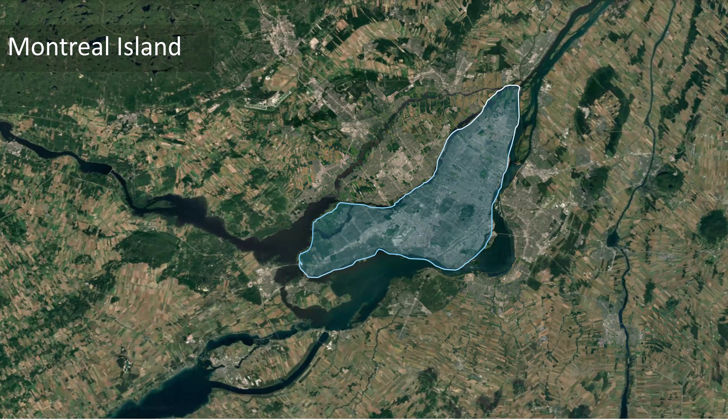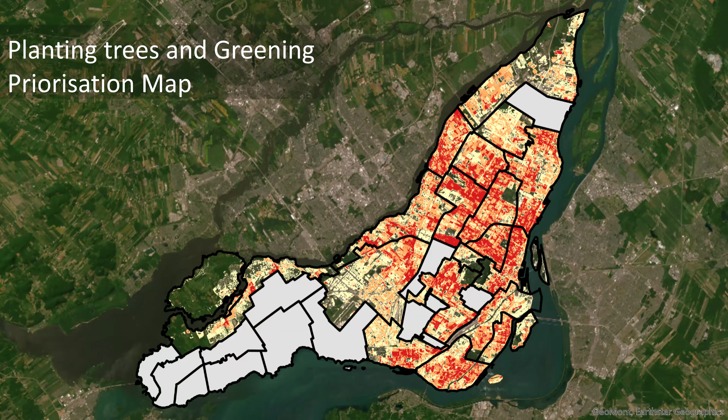What we do - the idea is why planting trees and greening cities. So the lecture will be not just on trees, but also on green actions that we have been taking so far to prepare Montreal for climate change, through the benefits that trees can give us in terms of carbon, and the benefit that we can use trees and planting - trees, shrubs, and everything - in this idea that this is essential to fight heat islands, erosion, and to preserve diversity through species, etc.

So just an idea like that: here is the idea of redesigning cities under the concept that a city can become the forest, what we call urban forest. This can be obtained through several guidelines that I want to underline here, like swales, rain gardens, to enhance the urban tree cover, and all this benefits us by providing ecological services, improving water quality, and better air quality. I'm going to show you an example of what we've been doing so far.

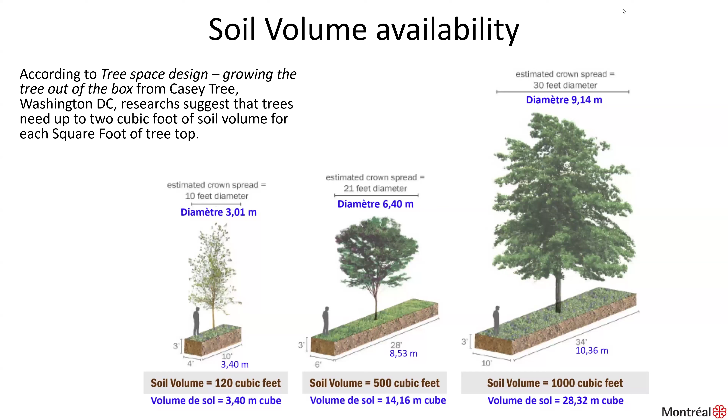So what we have been doing in the 2010s is developing ways and tools to enlarge these tree pits into 10 cubic meters. So that's what we see here - it's a calculation between the canopy and the volume of soil that the tree needs.

Here, several new species of trees - cultivar breeding species developed in our nursery in Montreal - these species are taken back by the private nurseries where we buy our trees for different garden and parks departments through boroughs in Montreal. So different types of new breeds - pine, salix, ginkgo, linden, maple, poplar, oaks, etc. All these are native and make better species to sustain the hazards and problems trees face when they grow along streets.

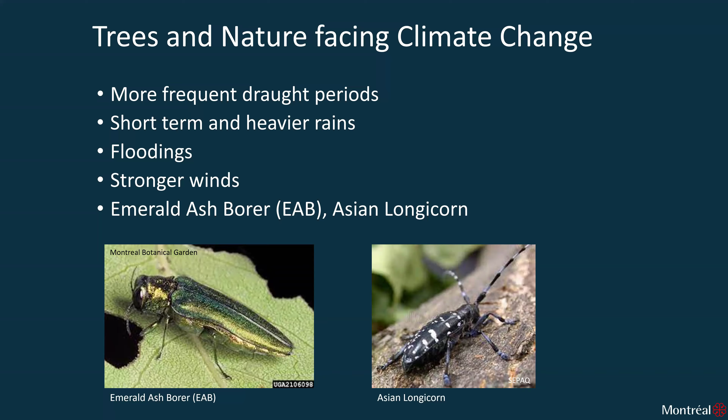And also all the problems that trees are facing with disease from insects, like the emerald ash borer and the Asian longhorned beetle, which you might know. So faced with the climate urgency, it's about acting against a climate crisis - reducing carbon and greenhouse gas emissions, and adapting for resilience to climate change. So the city of Montreal has been taking these issues seriously and tackling a way to go in a better direction.

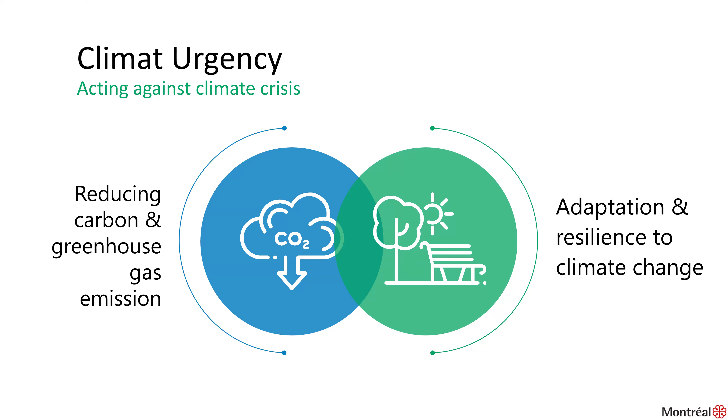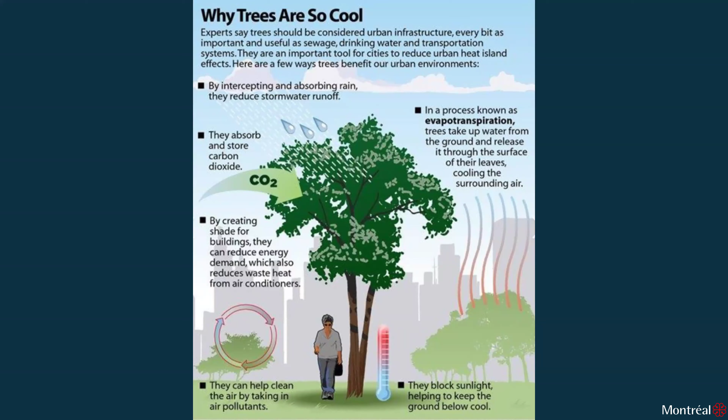This has been tackled by the climate change plan 2020-2030, which we've been implementing to move to a resilient and zero carbon city. The idea is reducing greenhouse gas emissions from 2013 levels. Our target is to attain 55% under 1990s levels, achieving carbon neutrality by 2050, increasing resilience and collective adaptation capacity, and gathering Montreal into an active community. This is to bring everybody together - not the action of one person or one group, but the action of everyone. Everyone is concerned.

Area of protecting natural sites - all this is to benefit biodiversity. We want to attain 10%. So far, it's almost 8%. But also we want to face the vulnerability condition to different climate issues.

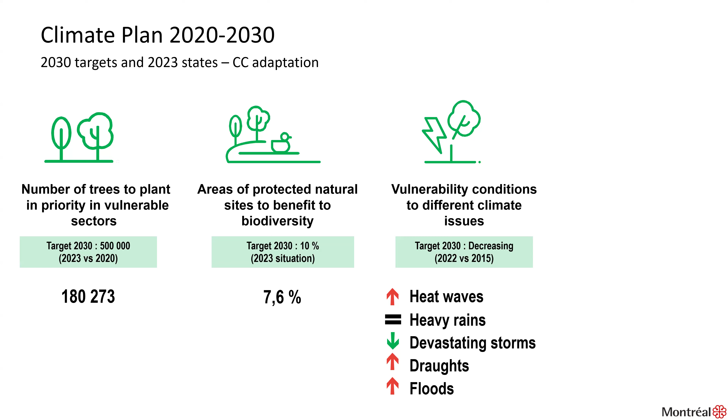The target we want to aim at is decreasing these conditions. But so far we see that heat waves are increasing, devastating storms are decreasing, but drought and floods are increasing. So that's the actual condition.

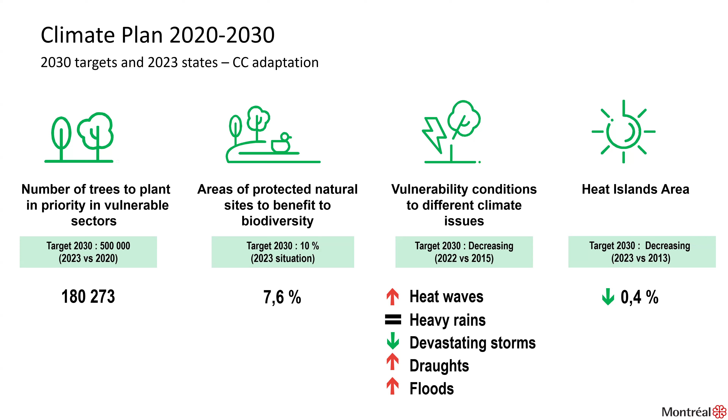We also want to take action on heat island areas. In terms of decreasing, the decrease is about 0.4 to 0.5%. So far we'd say we're heading in the right direction.

Following this, one of the ideas within the 2050 land use and mobility plan - the plan d'urbanisme - is one guideline: converting mineralized surfaces into greening and equality, to achieve the zero net objective. That's the idea here, and what can we do with this?

Well, one action we've taken is to remove and change Montreal schoolyards with a participatory project into demineralization. So we brought in concerned citizens and turned schoolyards into small parks. And all this is to protect and develop the urban tree canopy.

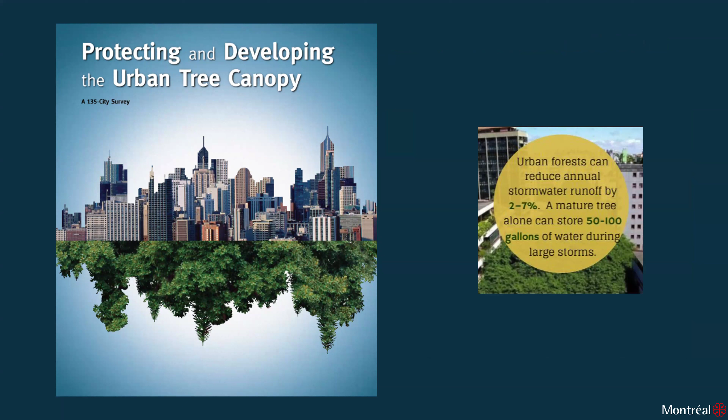That's the idea, because if we can achieve an urban forest, that could be a tool to tackle stormwater runoff. That's one idea - that the urban forest could help us do that, knowing that a mature tree alone could store 50 to 100 gallons of water during storms.

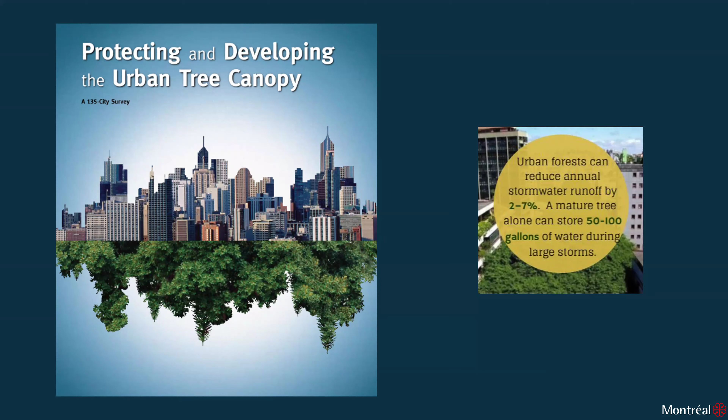Another action we took, that we want to improve, is to plant 500,000 trees. So far we've been planting about half of it. That's the idea, until 2030.

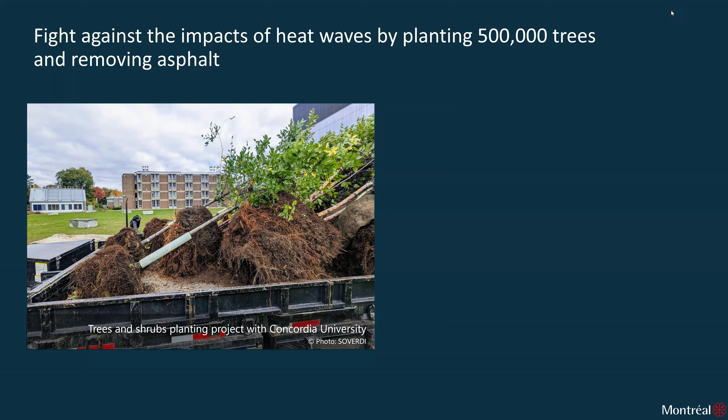This comes with projects like what we had at Concordia University a few years ago for tree and shrub planting with the association called SOVERDI. This has helped us develop new tools in Montreal, like the Montreal canopy map - a tool we have to record and have figures in order to see how it's going and how we can do better, identifying areas that are more vulnerable to drought and heat waves. That's the idea with the tools.

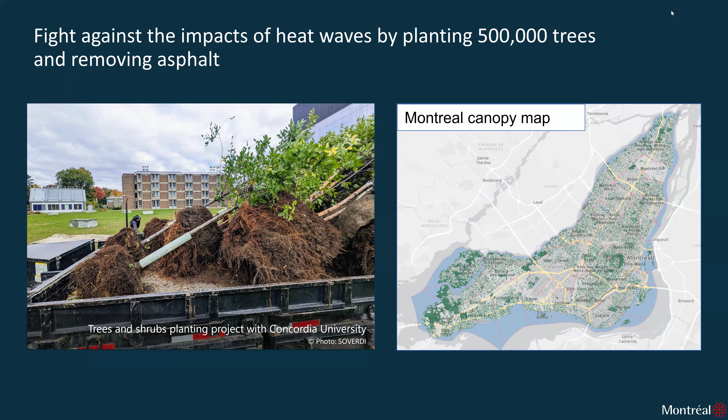We also had adopted the principles of sponge cities that I talked about before, as a priority for areas vulnerable to flooding. We did a public consultation on the future of water in Montreal, which gave us the idea of determining where flooding problems would occur. So we have mapping and tools that can help us identify the areas where we can take action.

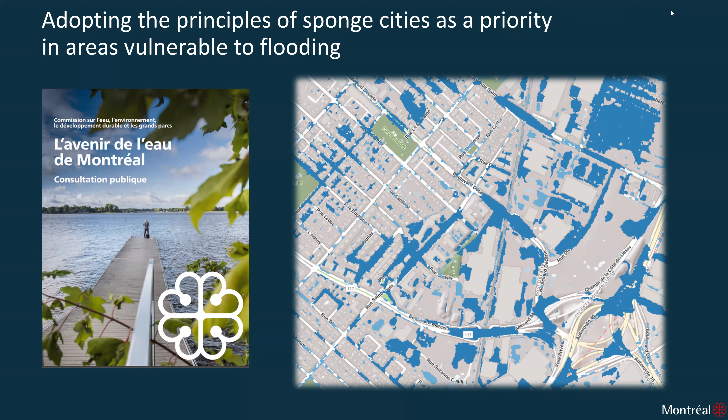Another action we're taking, another guideline, is through industrial activities where we want to restore contaminated soils - a constant issue when we do more construction and infrastructure in our streets and parks. We're always facing contaminated soils.

So what we do is phytoremediation, using Salix. It helps with biodiversity in eastern Montreal. It's been carried out since 2016 by a research group through the Botanical Garden of Montreal. It's really promising - this type of approach, and one of the main species used is the Salix.

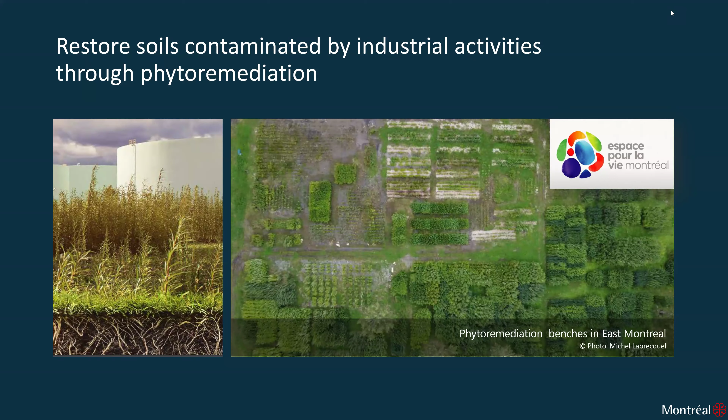So far, I'm going to overview some technical ways of greening and planting streets, things like sidewalk curb extension schemes. You can see here more space that we took from the road and the streets, and we turn it into green space.

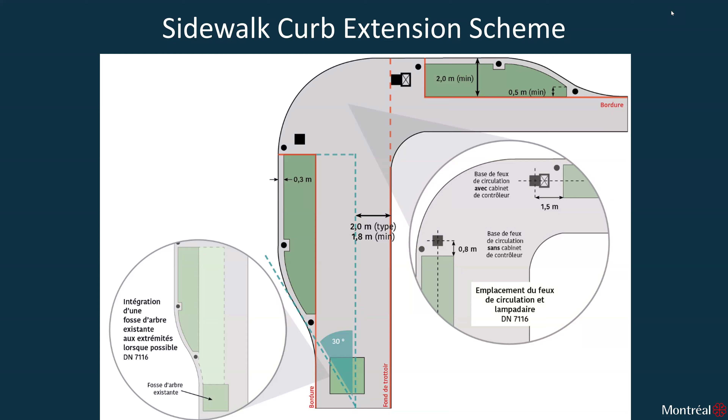These are what we call the curb extensions that's been implemented on intersection streets, more or less, and it's been growing very fast for the last 10 years. That's the new way of doing things, and these curbs will become resilient and will tackle runoff, becoming rain gardens as well.

So that's one of the ideas of the drawing, the normalized rain garden curb extension drawing. It shows how we've been providing tools for everybody at the city who is rebuilding streets, so we tell them how to do these type of things.

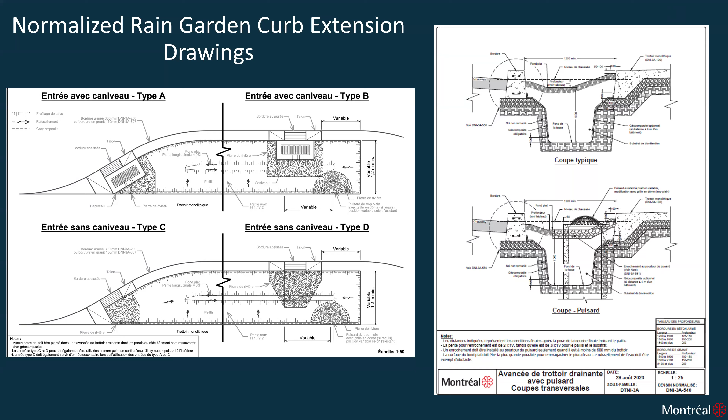That's the idea here. You can see the idea of having tree pits that are more available with more trees, more space for storing water, air and soil. So it's a 1 meter deep pit that we can have.

Next is the tree pit design for street infrastructure. It's normalized, a technical legal document, we call it document technique normalisé. And here is one drawing, a simple tree pit technical drawing.

You can see the reinforcement of the sidewalk slab that runs like a bridge, so it enables us to have more space for the root network of the tree into the soil underground, under the sidewalks.

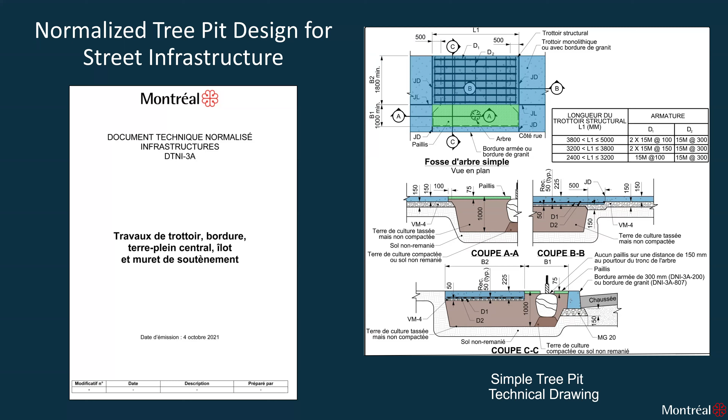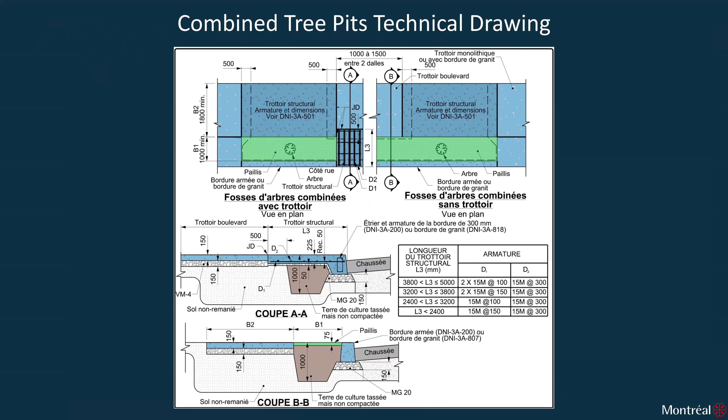Here is another type of tree pit. This one is combined, so we can have more space and more surfaces provided for greening. One thing I want to show you, maybe the picture is not very good, but...

We've been digging roots to show the underground condition of the root networks of existing trees. We did this research with Guillaume Couture, an urban forest engineer in the Parks and Landscaping Services, a colleague of ours. This picture shows how the root network excavation revealed that the existing tree was confined within the curbs of a central mall.

So we can see that the trees grow where there was soil, developing a network with roots in compression and roots in tension, in order to provide the stability needed for the tree to stand by itself.

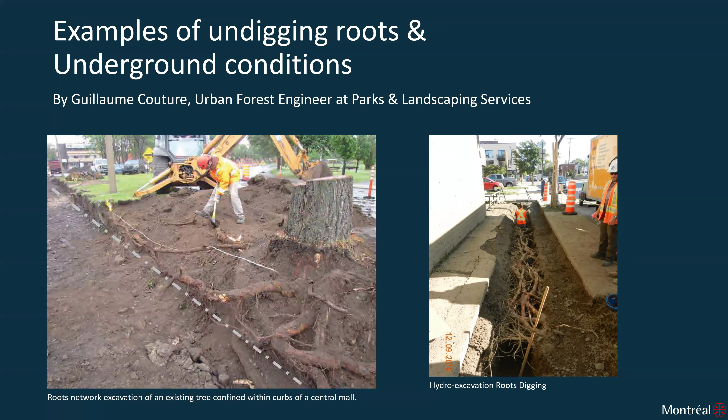Here's another picture from a work project excavating the sidewalks for the electric network. When we did the hydro excavation, we exposed the roots and were very impressed by how the tree can find its way with its roots to provide its own stability and have a nice canopy, even without much space available.

So I come now to the various researches that we've undertaken over the last decades. One of them is the McGill University research.

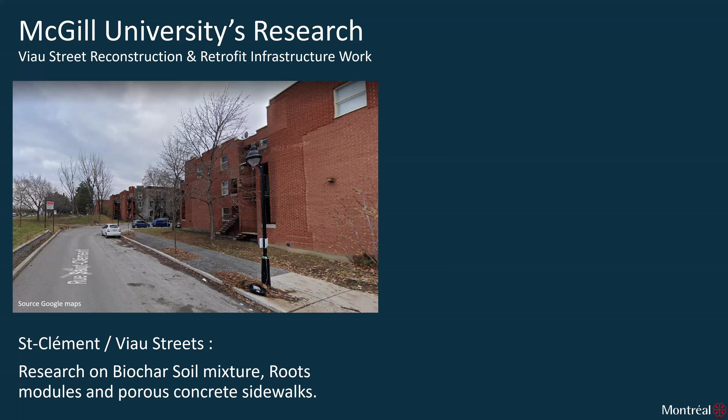That research was aiming to analyze and study a new type of soil mixture with biochar, and root modules like this one, used in the enlarged tree pit.

That's what we have been doing, providing root modules from various companies you may know, like GreenBlue and DeepRoot. And we do some research with porous concrete sidewalks as well, with the tree pits.

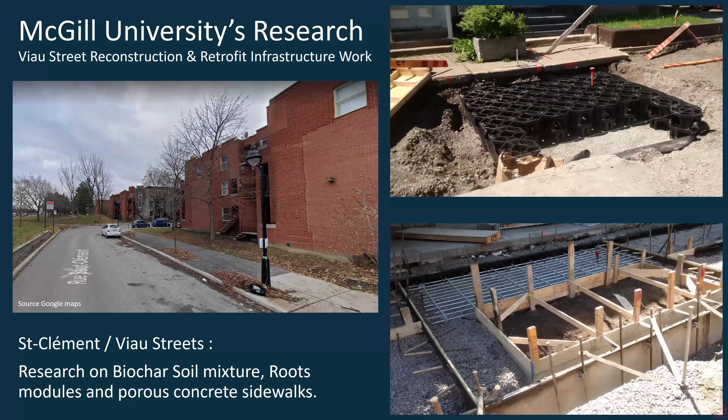This is a view of the enlarged tree pits I talked about before, with the reinforced slab, shown before pouring the concrete. You can see the soil underneath, and once the tree is planted, it can grow with more soil and more space.

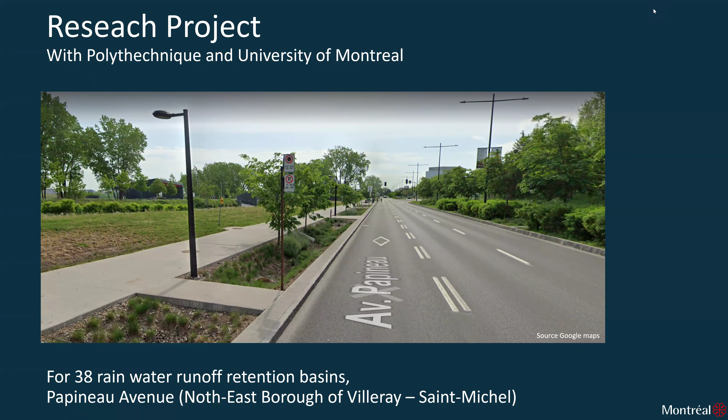The idea behind this is also to have greening surfaces more and more, but to have less maintenance time to provide for them, because the teams and the garden teams in the boroughs have less and less money for maintaining our green surfaces. That's an issue right now.

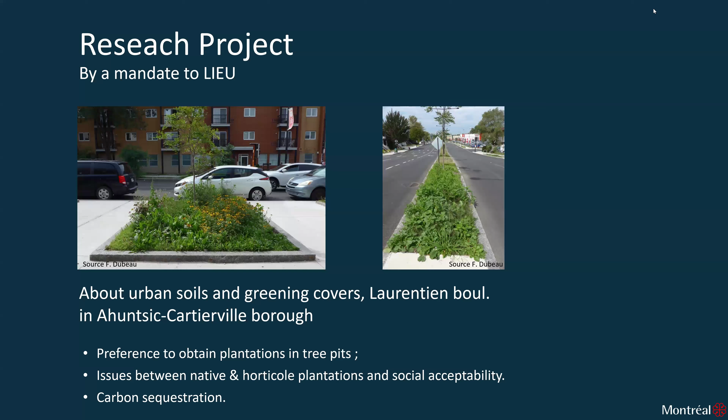So now I'm coming to a nature-based solution. That's what we've been doing so far in the city of Montreal. That's a new development with the Papineau project. That's been like a spark for everybody - woke up and said that now we need more, in 2015, 2020, with climate change and the awareness of everyone.

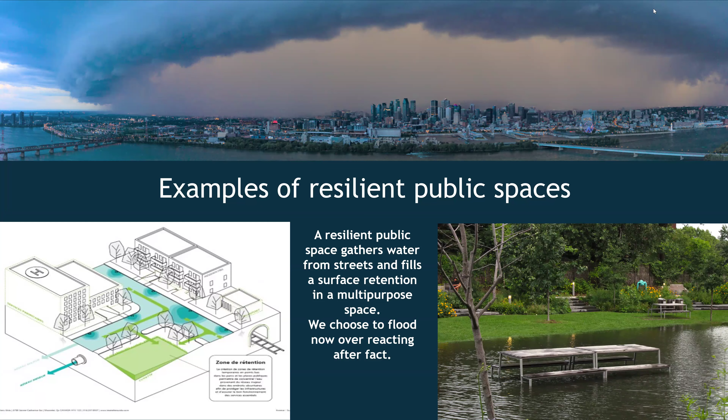So that's the idea of the Pierre-Dansereau Park. It's a retaining capacity of about 640 cubic meters of water - the water that would flow from the upper level of the district.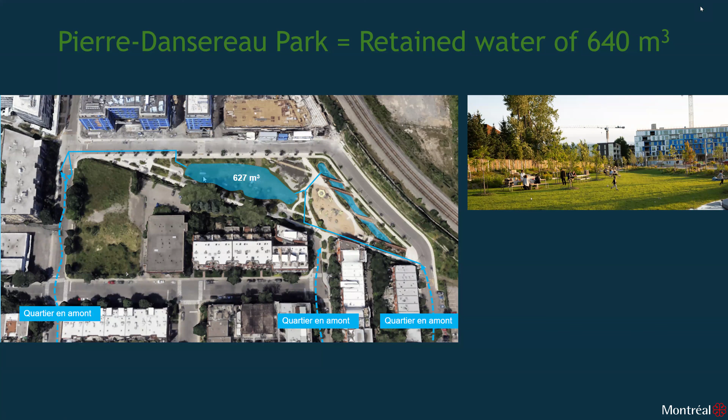And that's the idea of this plain where people play - it's a playground. Most of the time people play there, kids. Once the water comes, well, it floods. People aren't outside, but still you can have people or kids playing in the water. That makes it very interesting for everyone.

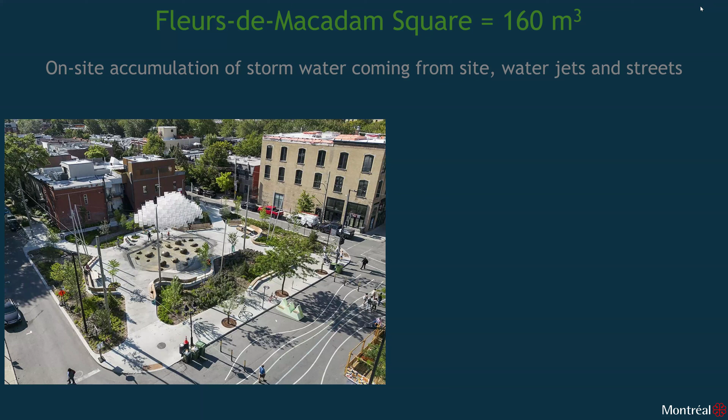So another one is the Fleurs-de-Macadam Square. It's a 160 cubic meter capacity of retaining water, through sites, water jets, and streets. So all the water that comes around and pours would come into the square. It's a very popular square in the Plateau-Mont-Royal - a very booming and popular neighborhood.

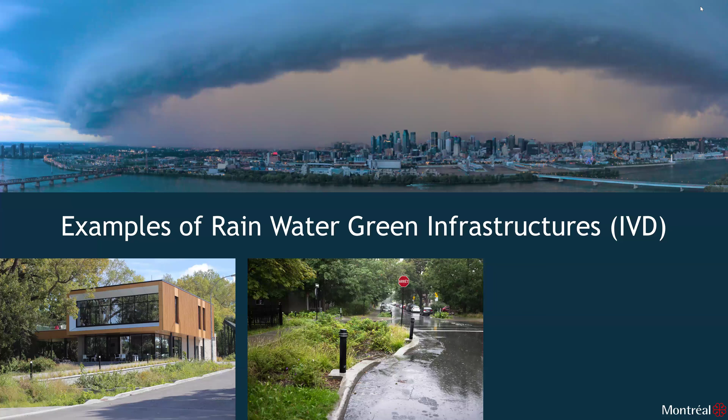So other examples are rainwater green infrastructure that we've been building. We call it IVD, infra verte drainante, and we can have rain gardens through the construction of new buildings. We also did extended curbs, bringing water into the rain garden and creating flowered spaces. That's the idea of communicating this infrastructure to people.

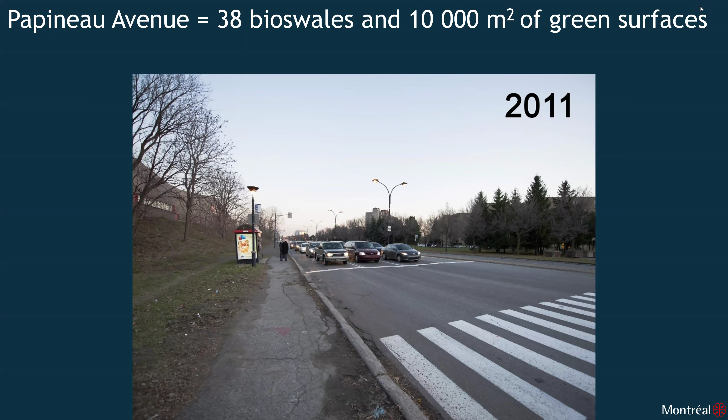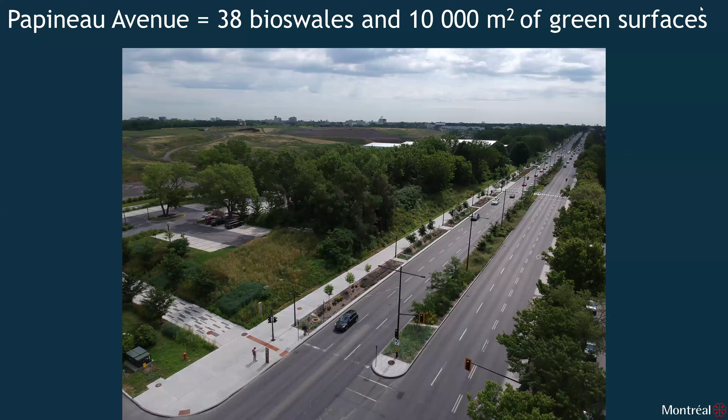So this is Papineau Avenue, where we have 38 bioswales and over 10,000 square meters of green surfaces. That's the aspect of the street in 2011. We turned it into a big green boulevard, reduced the number of lanes, and enlarged the sidewalks to almost 5 meters wide with the 38 rain gardens, adjacent to a big park in progress right now.

So just a few pictures here, of the bioswales with the greening, shrubs and grasses, the overflow drains, and the biodiversity I was talking about - insects, butterflies, and all sorts of new nature with birds nesting and things like that. So we did that.

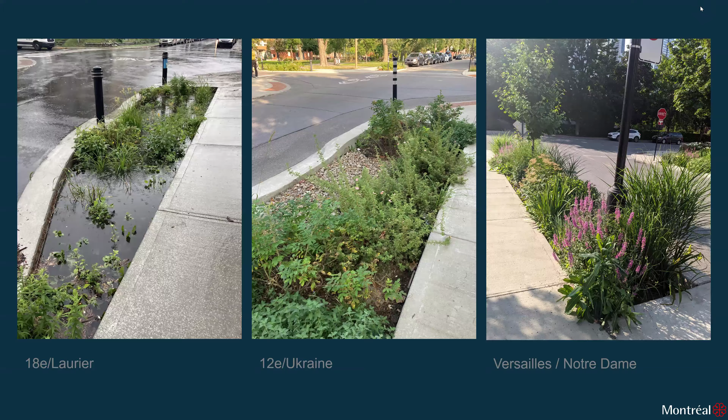So here is the last thing I want to show you - the last 5 minutes before ending - what we call Brébeuf Street. Brébeuf Street is a main typical street in Montreal.

We have this project with the town of Lyon in France. We have a partnership, and we turn it into water stormwater trees. The idea is to have street trees that would help us tackle water running off before entering the sewer.

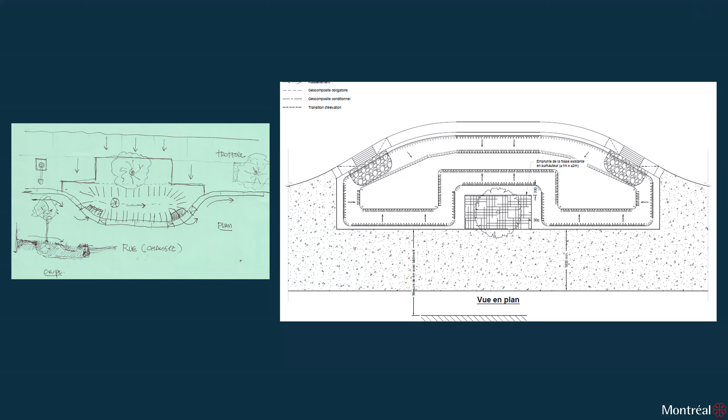Here are some sketches and drawings we've been doing. You can see the existing tree sits there, and there's a depression in the rain garden that has taken over some parking spaces. So when the water runs from the upper level to the lower level, we keep going like that. So we did some drawing.

That's the project conceived and planned in 2023, and we built it in 2024. So far it hasn't been planted yet, but we have 4 of them. We were able to identify four trees and four rain gardens that we've been doing so far.

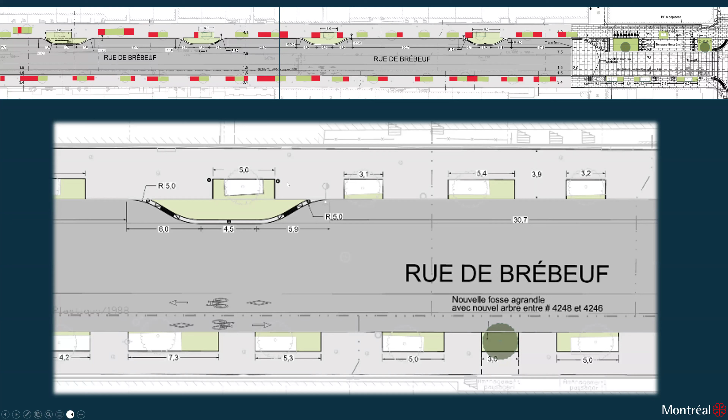Here are the pictures of what we built. The trees are there. We enlarged this tree pit so it benefits its root network, and we use it to bring the water into the rain garden.

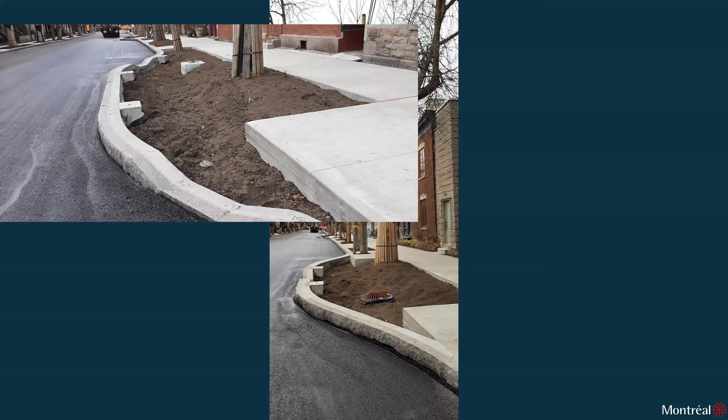With the overflow, that was the existing drain from the street that we kept, and this is another one. There's some variation between them, but they are the same type. The water would come through; it's not entirely finished, but so far we will be reshaping the earth and the levels, and we will be planting these rain gardens next week.

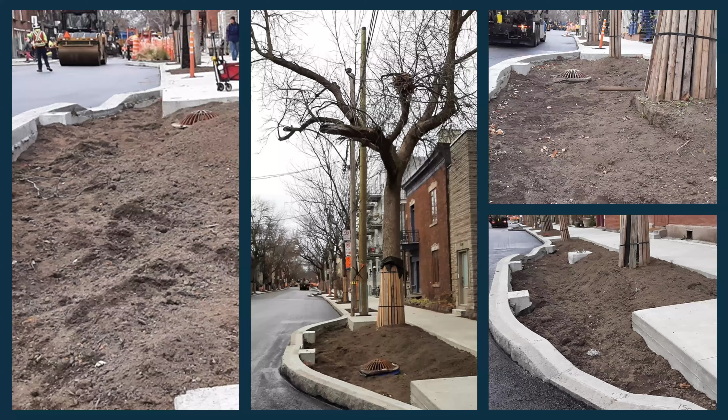This is a place where every user on the street - pedestrian, bikers, drivers - would share the available space with more equity due to their vulnerability. The more vulnerable you are, the more space you will be given accordingly. So that's the idea of greening.

This sums up the idea of having more livable cities. Everyone has his dedicated space in the city, and I hope that will bring us a better environment for all of us in Montreal and elsewhere. We hope that we are heading in the right direction. That puts an end to my presentation, and I hope you enjoyed what I said.